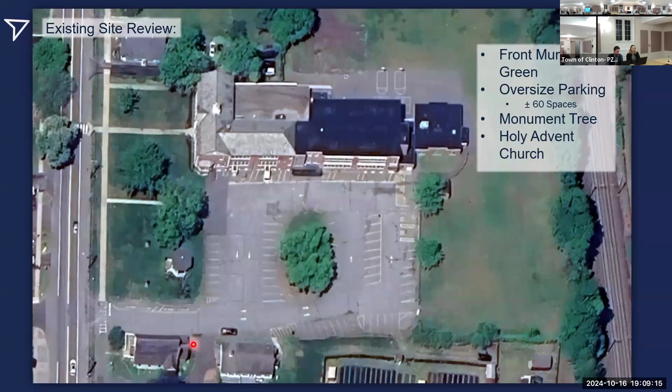Currently, to the south portion of the site, there is a municipal green that we are planning to maintain for the future, even after development. Holy Advent Church is located directly east of the property. There is currently an easement access into a portion of the property, honored with Holy Advent Church. This access point will remain through completion of construction.

As far as an overview of the proposed development, the dark beige area here is the existing school. We are adding on a three-story addition, which you see here, bringing the total residential unit count to 50 units. There is an existing portion of the front of the building that we will convert to be used by the town as a senior center.

It's going to be approximately 8,000 square feet of the building ground floor utilized by the town. Let me blow up the new proposed entrance here. The main residential entrance will be at the intersection of the new building and the current building, planted with nicer landscaping and a more plaza area entrance, with a semi-formal drop-off area and substantial handicap parking. To the rear, the red area you see here is actually an open patio that will be at the level of the former library.

The library will be converted into a community room, and this will basically be a secluded area with some screening behind it, essentially to screen some of the residents specific to the residential portion. There is a bike rack located to the rear of the property that will be fully covered, so residents can use them for a more extended period of time than typical.

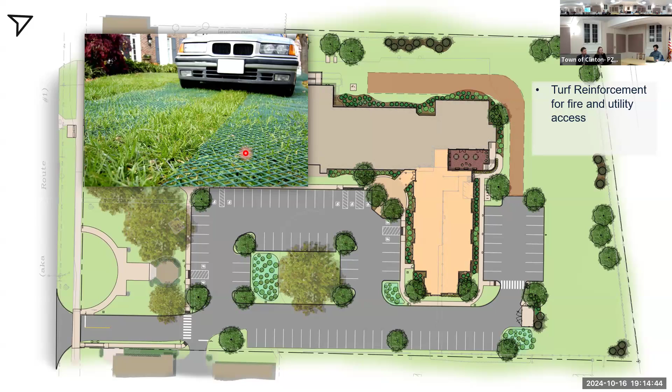Essentially, the grass grows up through it, it's hardly visible, but it still withstands support, able to support an H25 rating, which is the largest fire apparatus for the town. I contacted the Clinton Fire Department about the town's aerial platform, I believe the 971, their largest apparatus.

And I ran that through our program. So this is the actual size of the vehicle and its specifications, to ensure that it can get all the way around the parking without any interaction with any of the cars, as well as get up onto and over around the edge of the building to access the far side.

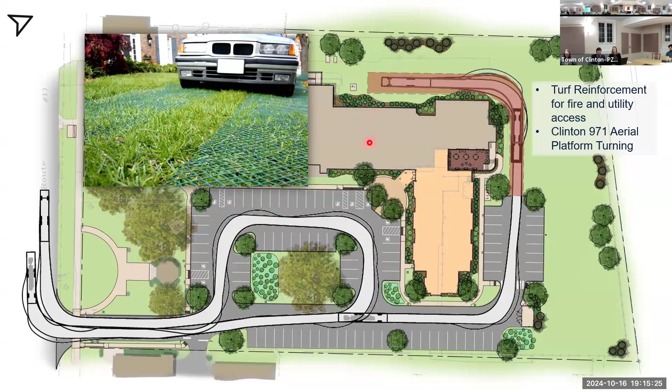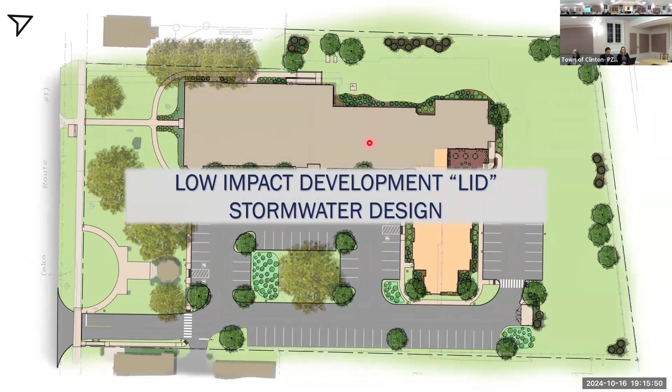Now onto the low impact development, the stormwater design. Clinton does not have a formalized LID design in their stormwater manual yet, but there have been multiple changes to the Connecticut stormwater quality manual as of 2024, enacted just in April. Although there are no specific requirements for it, it puts a much bigger stress on trying to provide more low impact development. Low impact development is essentially a land development strategy that uses natural processes to manage stormwater and protect water quality.

Separate from the standard, we have a catch basin with pipes connected to it. The pipes go to a detention system in the middle of the property. There are swirl separators that take out some contaminants, then hold all the water and release it. The intent behind this low impact development is to utilize what are often called biofiltration rain gardens.

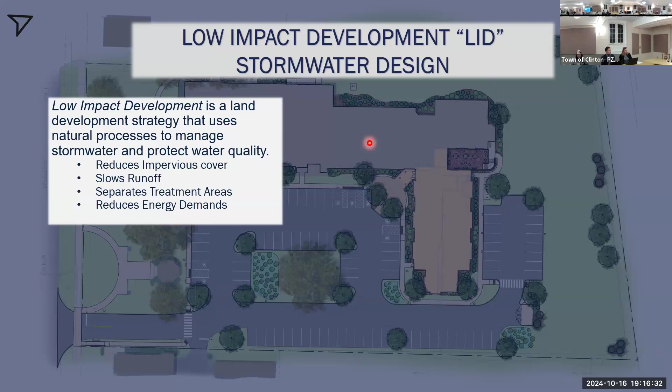So we are actually proposing the use of a FocalPoint, manufactured by Ferguson Stormwater Products. It is proprietary, and it doesn't need to be this specific product, but we chose it in particular because, unlike some others, it offers a guarantee that after installation, as long as a specific design is followed, that guarantee applies.

If you follow all of the requirements, the guarantee you get is basically that we guarantee this will work for a certain number of years. That guarantee, I can't very easily provide with a biofiltration design. This design comes with a guarantee, because if I designed it myself, I couldn't provide a guarantee that what I design is going to work.

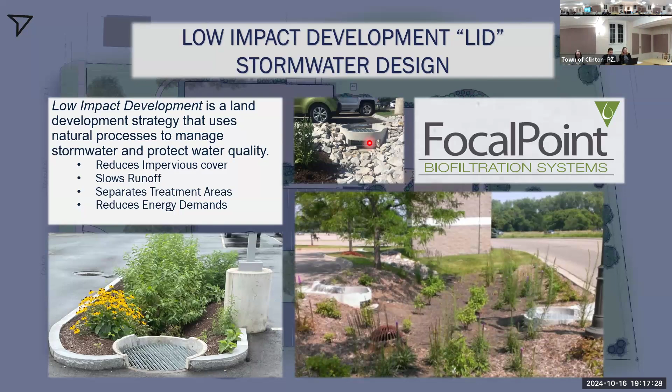Is there required maintenance? Let me go through that. No problem. Unlike a usual catch basin, which goes down with a large sump that catches a lot of the sediment.

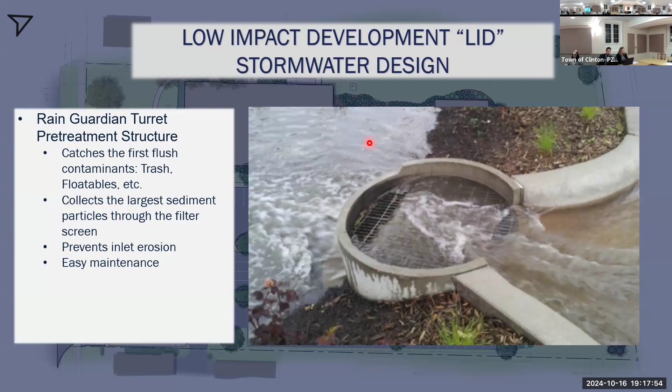Instead of using a catch basin, the product they use is called a Rain Guardian Turret. As water rushes into it, it looks just like a catch basin, but the difference is it's only about 18 inches deep. So all of the large floatable material, trash and everything, is caught right at the top grade, so it can be cleaned at any time. Because it's only 18 inches deep, a standard landscape crew can basically clean any of the sediment as it runs through—floatables get caught on top, and larger sediment and particles get caught in the screen.

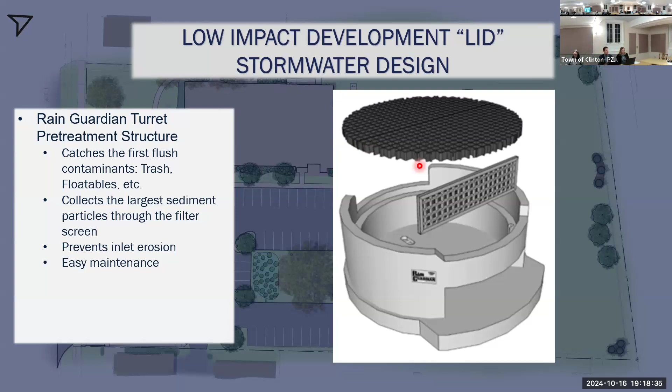The screen essentially gets cleaned out when the standard landscape crew comes in and does their usual landscaping every spring. This can function for longer than a year, but it's intended to be cleaned once a year.

Once it gets through the pre-treatment device, it gets into the actual focal point itself, which essentially looks just like a garden. Below the surface of the garden, though, there's 3 inches of hardwood mulch, which filters out the majority of the remaining sediments and contaminants.

Then there's 18 inches of this high flow media—a proprietary media blend, about 80% inorganics and 20% organics, designed to basically self-treat itself. As contaminants come into it, they work with the contaminants in addition to all of the plantings, which are designed by a landscape architect to specifically absorb them. Plantings are some of the best at treating heavy metals, phosphorus, nitrogen, and so on.

So that's basically a self-cleaning process. I spoke to them, and again, they provide a guarantee and have given me documentation on that. They said that as far as maintenance is concerned, there would be—yes, Mike.

Does that media get clogged at some point and then changed at all? So I asked them about that, and they said at most they've seen the media have to be changed every 10 years. But they don't have a requirement for that, and they said if standard maintenance is maintained, there's no reason why it couldn't continue to function indefinitely.

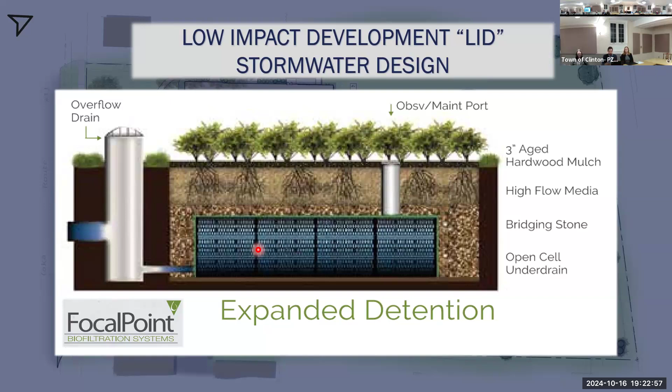It's about 98% void space versus an arch chamber, which even though it's 100% open, is probably around 75% void space when you count all the stone and everything. So you're able to have a much smaller footprint with these detention areas, and they essentially function to detain the water for that specific focal point.

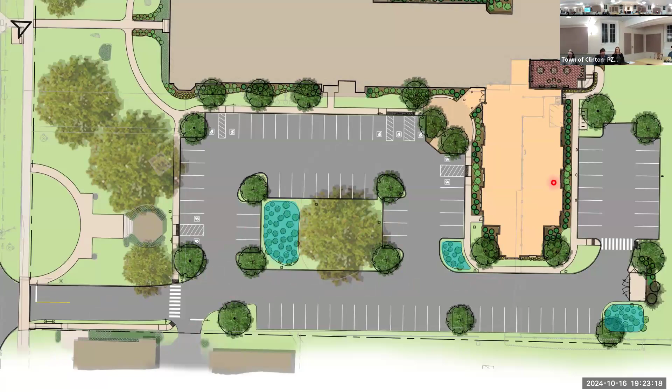So I'll switch over to the plan and explain what's going on. The three areas identified here are the focal points for the property. This portion of the property here will all drain into this focal point. This portion of the design stretches into the existing building, and that will drain into this focal point here, and then the rear portion of the site will drain into this focal point.

What the LID design does, instead of taking all of the drainage system and putting it through the pipe into one localized area, is individually separate each of those areas into specifically engineered areas. As a result, you can substantially reduce the size of your treatment because you're only focusing on this amount of area as opposed to the entire site design.

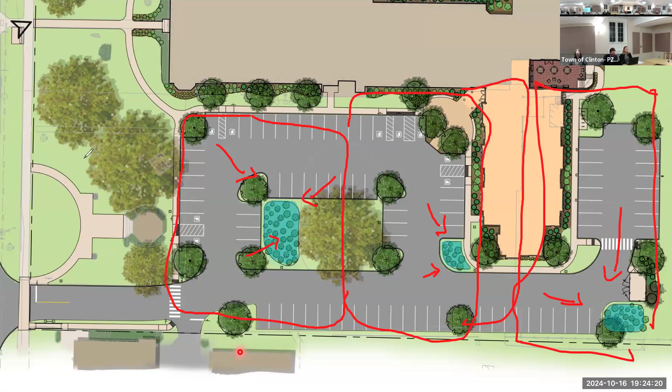Is this catching all of the roof runoff also? Yep, that's what I'm trying to get to next. The larger size of this detention tank right here is essentially catching all of the proposed new roof.

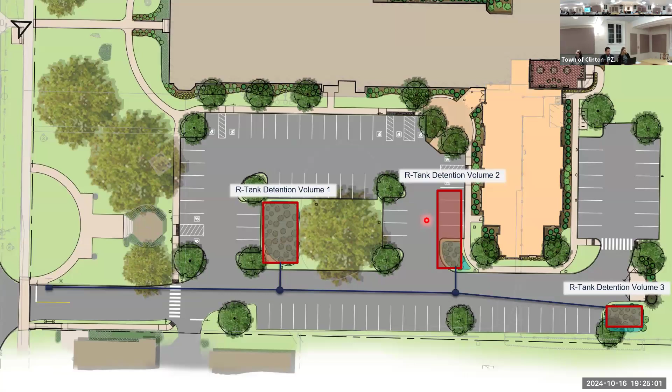For the existing roof, because Clinton has one of the highest rated soils that I've seen as an engineer for conservation purposes, and because all of Clinton has septic systems due to the quality of the soil, we've chosen at this point for the existing site to maintain the existing dry wells on site as part of construction. One of the initial steps will be to unearth all of these dry wells and make sure they're all functioning. Based on my examination of the test pits and everything on site, I see no reason why they wouldn't continue functioning, especially since this is clean material coming from the building itself.

If they are deteriorated, we always have the option to add additional space onto our tanks to create additional detention and connect the existing building directly into those tanks. That's not the direction we went for this, just based on how the soils work, but it's definitely something we can look at and wouldn't be substantially expensive to add. I don't believe, based on the quality of the soils out here, that it would be necessary.

Part of the stormwater management report requires reducing the 2-year storm by 50% - it's one of the new zoning regulation requirements. We were able to achieve 37%. It's almost impossible to get to 50%, and that's something I have to take up with the state regarding the way they've designed it.

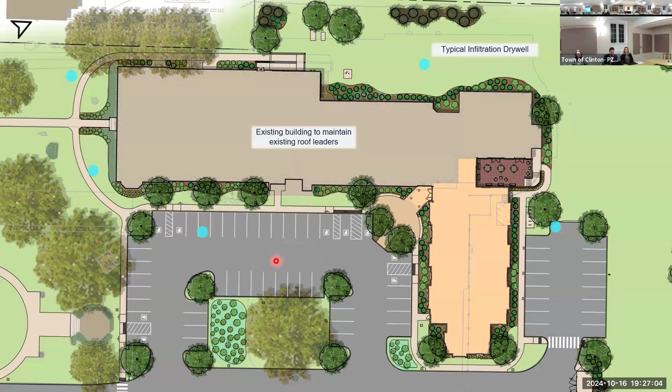As far as the site utilities presentation works here, well, I mentioned that we were doing 50 units.

The requirement for the State of Connecticut Department of Public Health, in order to maintain the size of the system and not end up kicking it up to a deep review by the Department of Energy and Environmental Protection, we can't go any higher than 7,500 gallons per day. Doing the calculation using the technical standards, if we add up the 50 units plus the 8,000 square foot public space being utilized for the senior center, that total quantity is below the 7,500 gallons per day, which is essentially what set our unit count at 50.

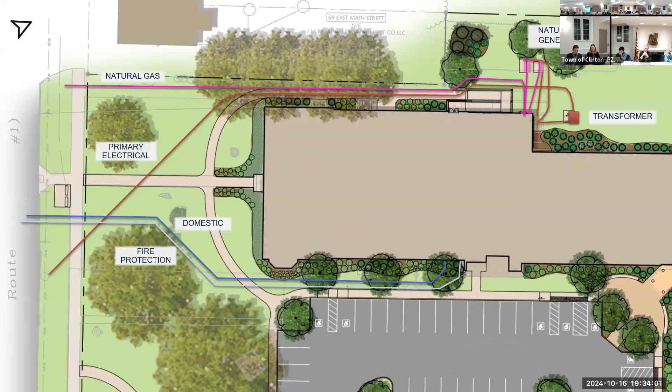I'm going to talk briefly about the landscaping. I am not a landscape architect, but that's one of the main things I'd like to focus on. Everything identified here in olive green is existing, and we are proposing to maintain as much of that as possible. Our original plan actually showed a new oak tree getting installed somewhere in this front area here.

It was requested by the tree warden that get eliminated, as well as question whether we wanted to utilize oak trees in other portions of the site due to the fact that they dropped the acorns. I've spoken to my landscape architect about it. We've maintained a few and we've switched out some for other alternative species as necessary. The dark green you see are all of our proposed plantings.

One of the other questions was we had shown a number of white pine, the tree warden also raised an issue - in the past, as they continue to mature, the lower limbs die off and they basically break up. There could be hazards, so he requested the use of green giants, a type of variety. We supplemented that with some additional other types of species. All of the species we proposed are all native to Connecticut, native to this area. We don't have any invasive listed, and those modifications will get incorporated into the final land record set.

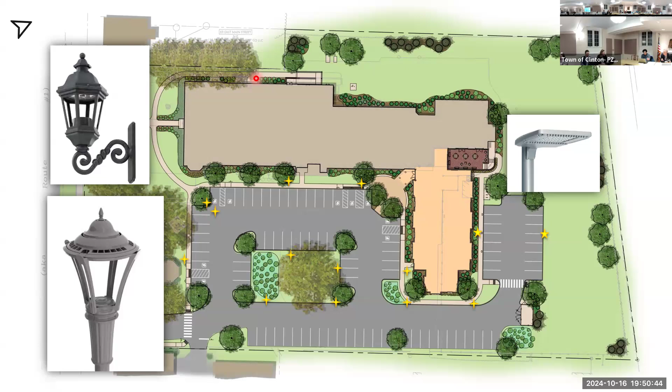And I apologize, I'm going to delve into your territory - the annex on Google Maps. I count about 35 spaces behind the annex. That is shared also with the Chamber of Commerce that's back there - the Chamber of Commerce is the building next door. So the annex only has the spaces directly behind.

Yeah, it goes along the back row, and then you go along the river, big park. So that's 23 spaces behind the annex.

Yes, again, if we have the ability, the planning is able to be coordinated - when you guys come up with a grant, they're just using town hall.

Council President, please. Again, for the record, Susan Odell, Paul Bailey Architect - I am an architect and senior associate at the firm.

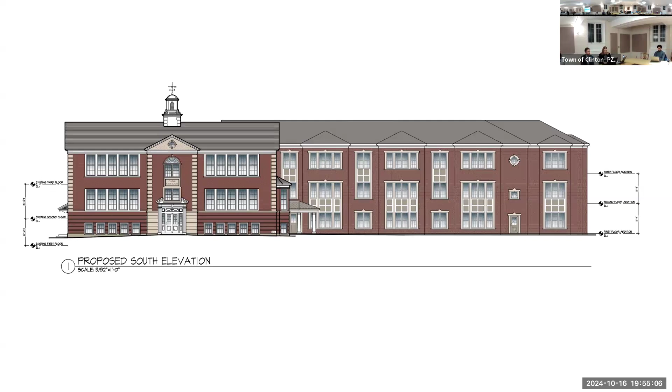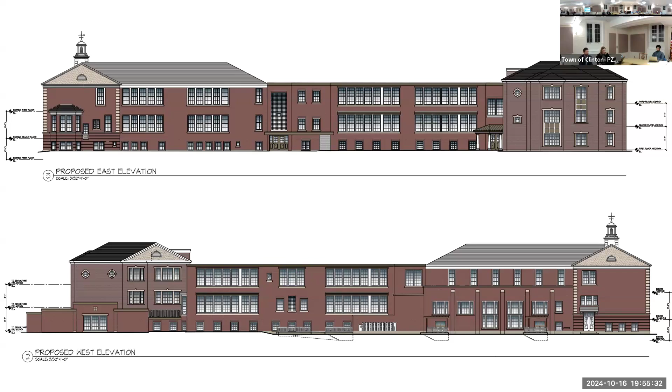Just showing you the two sides of the building, so the proposed east at the top, that's the side of the school you've seen for so long facing the parking lot. Down at the right-hand end, the mirror image is the west side of the building at the bottom. It's a little harder to see from the street, so it's not as familiar to everyone. But you can see on the left-hand side our addition with the little one-story library.

And then just the front and back of the addition itself, that's a section cut through the existing school building on top, and the south side, the front of our addition at the top and the rear of the addition at the bottom. Inside of that rear view, you can see again.

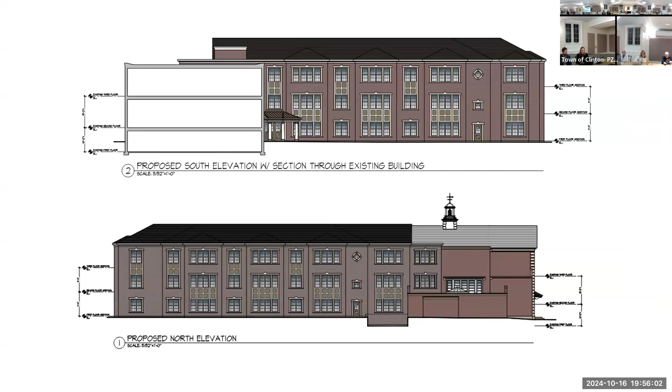As Frank mentioned, it will be largely kept intact, with certain elements restored to their existing story, such as the doors into the gym and the windows.

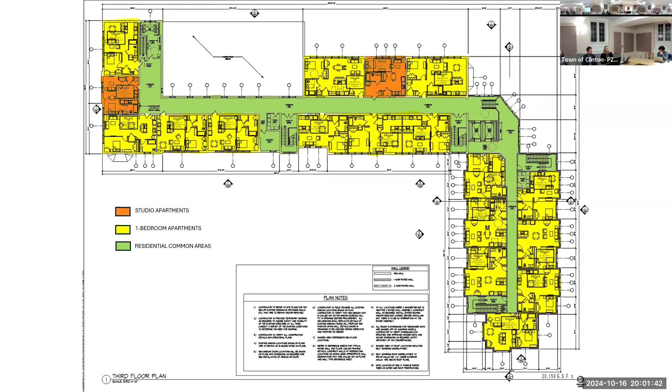This floor. So second floor, the blue is the senior center, it's the two-story gym that you're looking at. So that's kind of open air that you're looking at the senior center. And then green again is the circulation, yellow is the one bedrooms, and orange are the two studios. And the same thing basically on the third floor, minus the senior center two-story portion. You're looking at the roof of the senior center, but essentially the same layout on the third.

So 50 units total: 6 studio apartments, 44 one bedrooms. Housekeeping closets or offices. There's a large gender-neutral restroom, and that exists on each floor, stacked on each floor.

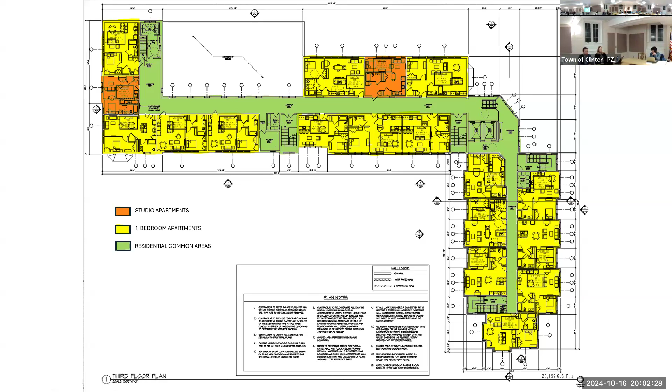Okay, at this time, then, I would like to allow anybody from the commission that has additional questions to ask.

Are there any municipal offices in this building at all? Only as related to the senior center, so there is one office space. It won't be like a nursing office or anything like that. No, there's no such thing. The offices in the residential portion are for management. There's no supportive services.

And just to clarify, access to the senior center is either down a half flight of steps or by the lift for wheelchairs, and then thirdly, a ramp around the back of the building. Now, I thought the ramp was primarily as an emergency egress, is that correct? It is, but it could be utilized, and there was some concern when we met with the town, in case the chairlift is not operating for whatever reason. It could be utilized. Thank you.

The goal is to have folks come in through the main door where staff can see folks coming in, so if anybody has an issue, we know when folks are utilizing that rear space. Who's your staff? So Christina Abenbora is the senior services manager, and then as volunteers or other contract folks come in, over time the body of staffing of the senior center may evolve, but that's who's with us for now.

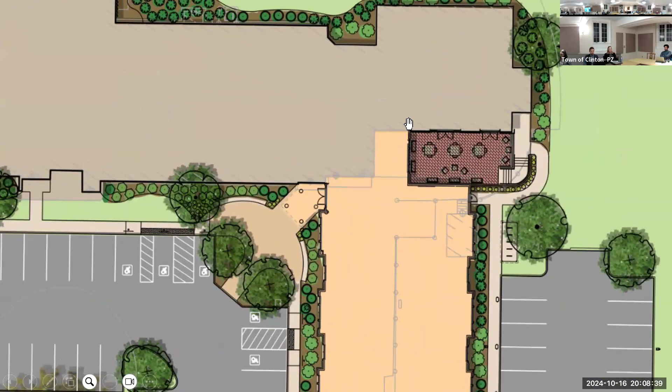The patio, no, not in and out of the building. There's steps up from the patio to grade because that library floor is at that same first floor, which is down below grade. The steps are going down from grade down to the patio, but the access is through the community room to the patio. That's the accessible route to that patio. So you'd already be down to access the back. Right, you would go through the community room. It's all level. But it's not access to the outside, it's not a ramp to it.

It would be equitable in that users of the community room have direct access, flush access to the patio itself, but they would not be able to exit. I think a wheelchair user would not exit the patio up to grade.

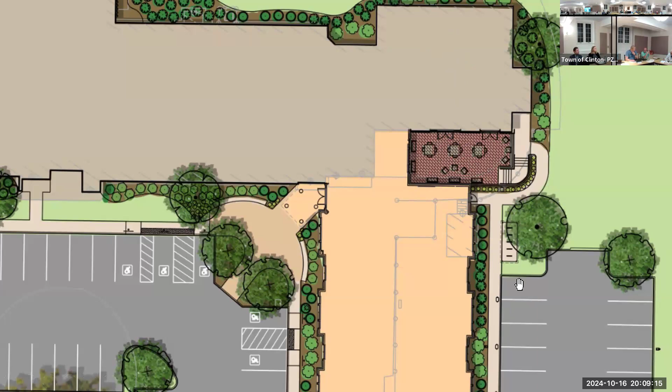Go ahead, Jeff. I just want to clear up confusion that I heard from you over there. The senior center, though, you can access the rest of the building from the senior center, right? No, they're 2 separate.

So who, I'm not sure, to kick the dead horse, who's gonna negotiate this maintenance would be with the snow, the ice, the ramps? Final details on the programming of spaces and how those spaces will be maintained. So fundamentally, for the purpose of this commission, the spaces will be maintained because they have to be. In terms of who contracts with who, who pays for what portions, whether there's common contractors, town services doing some things, all of those will be worked out in the programming piece.

That is something that goes through the town manager and town council, so that will happen through those negotiation pieces for the ownership portion and the lease back portion of the building. So that's part of the next series of conversations. This is truly about whether the site meets the minimum requirements in order to go forward.

I think they did a wonderful job. I mean, it's nice, I like it. And just to clarify, this is the very beginning of our process as developers. Yeah, it's nice, I think you guys did a great job. I'm glad to hear that. I just mean that there's still lots of things that need to be done related to this. Oh, I'm sure.